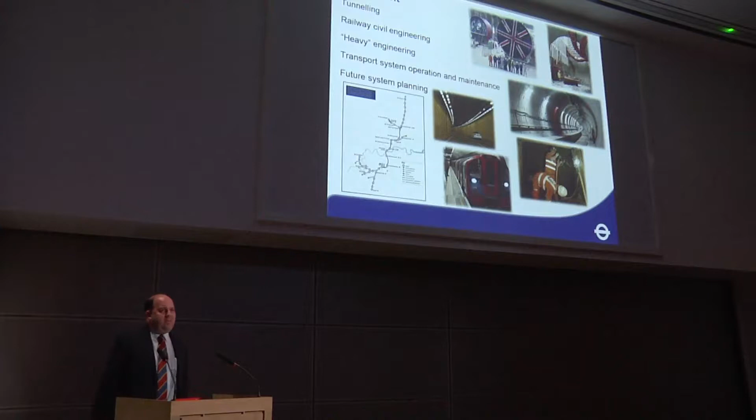So that bit of context and heritage. Well, you've just heard a few kind words about me. My natural habitat is, professionally, it's wet, muddy, there's not much daylight, it's about 30 metres down typically. I've spent my career around holes in the ground. A bit of time on design, quite a lot of time on construction, but also quite a lot of time operating them and maintaining them, which I actually find quite an unusual viewpoint. So that's where I'm coming from.

Just had reference to the Channel Tunnel Rail Link, High Speed One. It's a good example of the sort of thing I've enjoyed doing during my career, and where I think as engineers we've been able to bring quite a lot of innovation into the delivery of a transport system that can make a real difference to areas of the country, and in this case international travel.

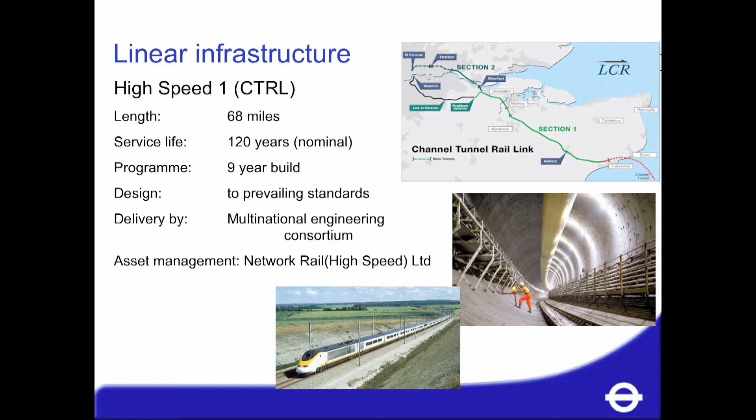So it was a railway nearly 70 miles long. It took us about 9 years in total to build it. Like a lot of big engineering projects, it was a multinational engineering consortium that delivered it. We worked to the standards of the time, developed, tuned to our particular needs. And these days it's managed by a dedicated maintenance organisation.

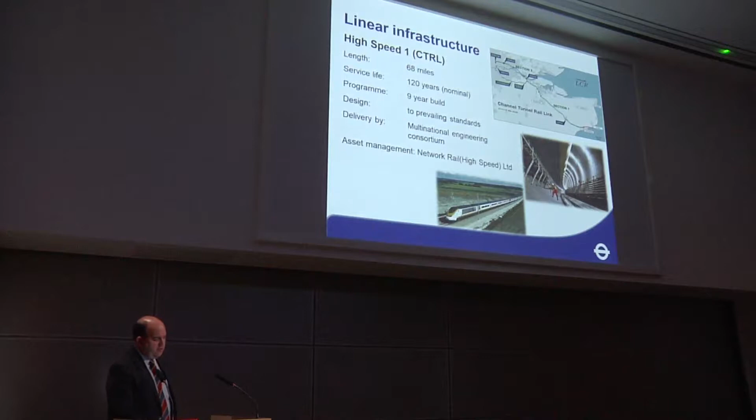So there we are, there's a quick pen picture of a piece of linear infrastructure. Most of what I deal with is linear, it's road and rail, and you find linear systems have some common characteristics. That's a job I certainly feel very proud to have been involved in, and I know a lot of my colleagues do. But I started thinking a bit earlier this year about what I might talk about tonight, and I was actually on another piece of linear infrastructure at the time. I was actually up on Hadrian's Wall with my sons.

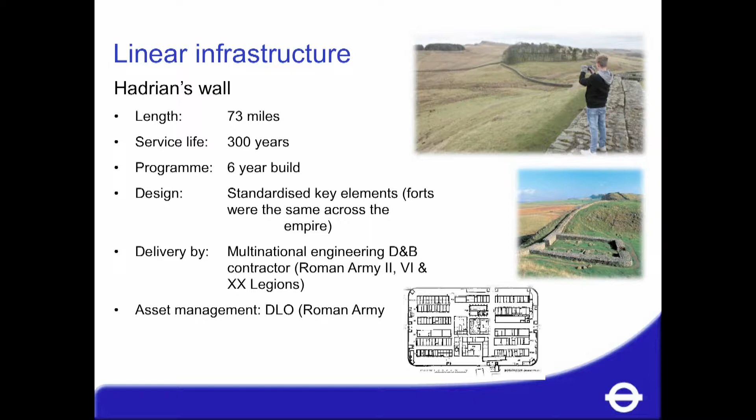Now here's a piece of linear infrastructure. It's about 70 miles long. It took about 6 years to build this one. Interestingly, it was standardised design - the forts are just the same wherever in the Roman Empire you look. It was a multinational engineering contractor - I think that's a fair term for a number of Roman legions. And they didn't dirty their own hands with maintaining it, they got a DLO organisation to do that.

And I stood there on Hadrian's Wall up at Housesteads and thought, actually, this is remarkably familiar, isn't it? I actually thought, well, 2,000 years on, we might manage to build something slightly shorter that took us a bit longer to do. We didn't have quite the same lifetime expectation, and our delivery model was perhaps similar. I found that a fascinating comparison. It really made me think about what changes in our industry.

Because on the face of it, you could look at that and say, well, where's the progress? Why couldn't we do it in 6 months or build twice as much or whatever? And of course, when we drill into it, the engineering is quite different in the detail. But it set my mind going on change, and also reminded me just what impressive engineers the Romans were.

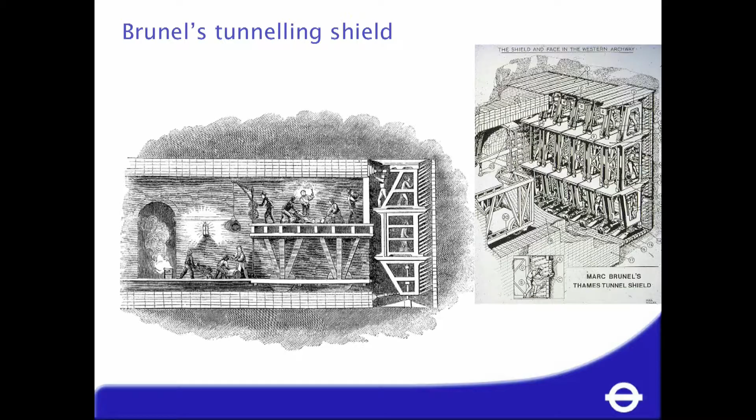So let's have a think about some of the engineering heritage a little bit closer to home for London Underground. We do have a great history, great heritage of innovation within the London Underground system. If we go back to the earliest days, almost 200 years ago, the oldest tunnels that we currently run trains through were, of course, constructed by the Brunels using their newly developed tunnelling shield. It took them a long time, they had some mishaps along the way, but it was undoubtedly innovative work.

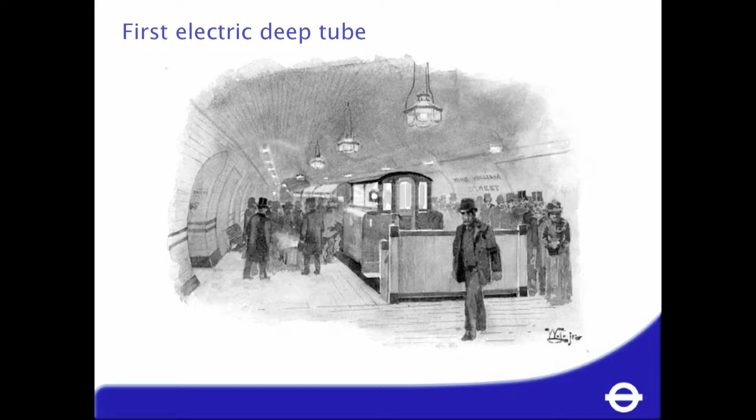We pioneered the deep electric tube. This is the City and South London Railway. We're still only in 1890 here. This is a long time back. We're more than a typical civil engineer's design life ago, but we had electric underground railways opening up in our city.

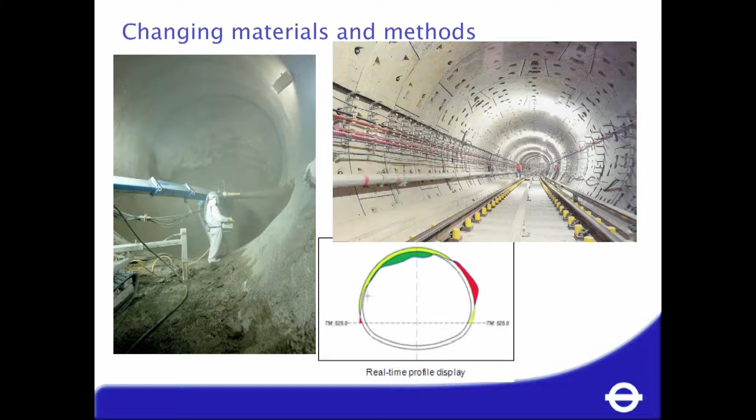Of course, if we dive into the civil engineering, get closer to my home territory in tunnelling, lots has changed there. Materials have changed, methods have changed. In the early days, it was a cast iron structure or a masonry structure. These days, most things are concrete, whether it's high-specified precast concrete like the segmental tunnel there, or increasingly sprayed concrete. And it's delivered with complex computer-controlled systems, whether controlling the erector of the segments or the spraying robot on the left. The little graphic at the bottom is what the nozzle man spraying the concrete can use to guide him where he's sprayed too much or too little.

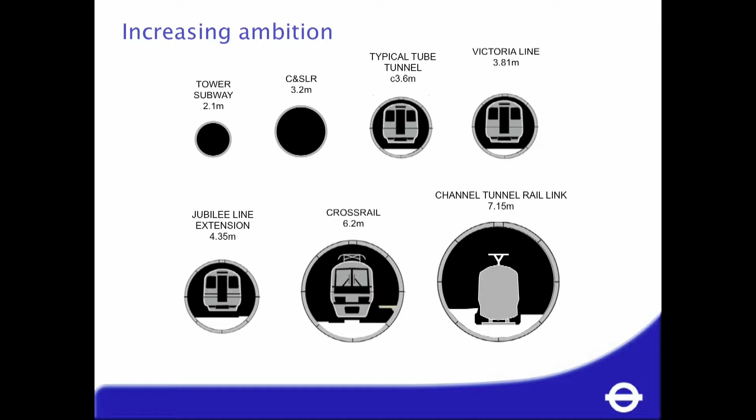And as all these technologies have come along, frankly, we've got greedy. We have asked for more and more out of these systems. This shows you graphically how the sizes of running tunnels have changed in London. The Tower subway, not actually part of the underground system, a slightly earlier railway, down at 2.1 metres, was a triumph at the time it was created. As the tube network was delivered, we successively got larger and larger, greater expectations, coming through to the Victoria line and the Jubilee line extension. We were starting to think about walkways and so forth, getting bigger all the time. Then recently we've delivered the CTRL and Crossrail with much larger tunnels again. So we're ambitious for what we want to achieve.

So there we are. I said my theme was change. Do we need to change? Before we dive into the actual engineering changes in more detail, let's think about why we might want to change in London's transport system.

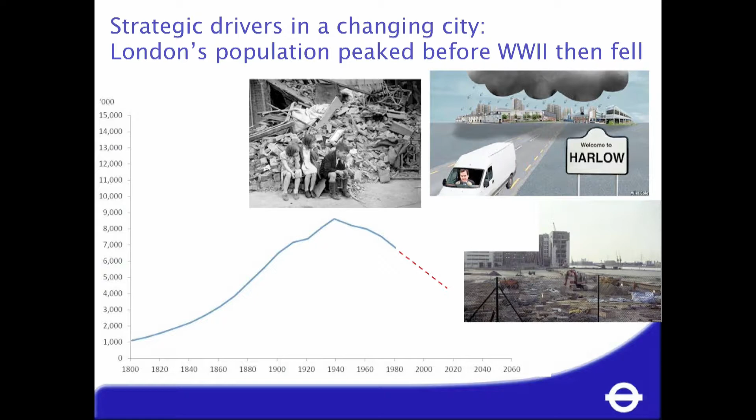This is a population graph for London, the sort of thing you might have seen presented around 1980. You can see that when the Brunels were tunnelling under the river, right at the start of this story, there was a little over 1 million people resident in London. The population grew steadily right up to the time of the Second World War, reaching a peak around the 8 million mark. But then after the war, it changed. There was the disruption of the war itself, social change after the war, development of new towns, and decline in industrial areas in the city. The population dropped away with those things, and it was expected for quite a while that that trend would continue.

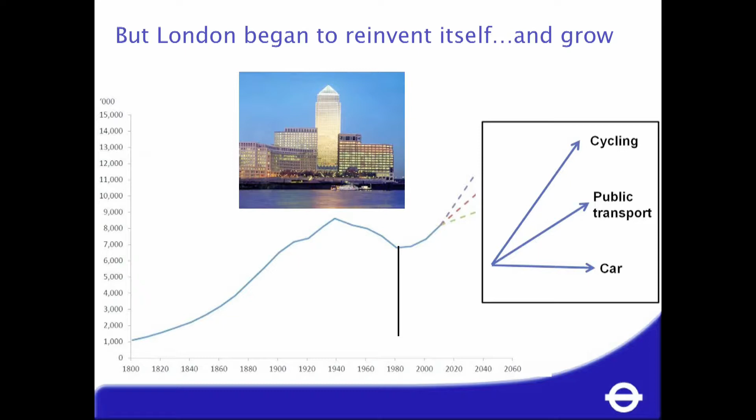But London had a surprise. If we look back now, we see a change in that trend again. Around 1980, 1981, the population decline reversed. Those who were around the city at the time will remember Canary Wharf as a key development of the era and a figurehead for that change. Since then, we've seen steady growth, to the point that earlier this year London's population reached its highest level ever - we're now back up at around 8.5 million, and we're planning actively for a city of 10 million in the fairly near future.

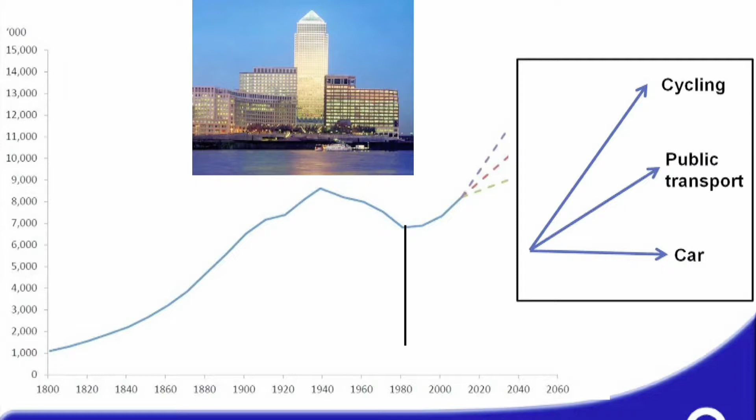And with that, we're seeing change in transport demand. You can see the graphic showing how the transport demand is changing. Cycling's racing away there - of course that's the trend, though the total number of cyclists is still relatively low. Public transport usage is rising greatly, and the car is flatlining. So that tells you something about the demand for infrastructure in the city.

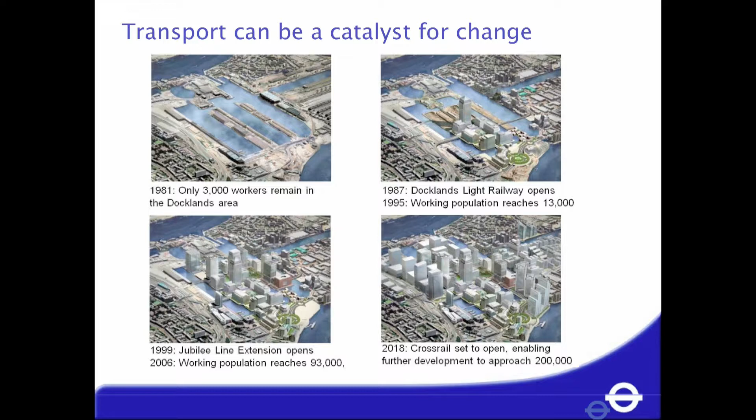If we look forward to 2018 and the opening of Crossrail, we're looking at a further doubling of the working population in that area, back up to around 200,000. So transport and growth and change are intimately linked in this city.

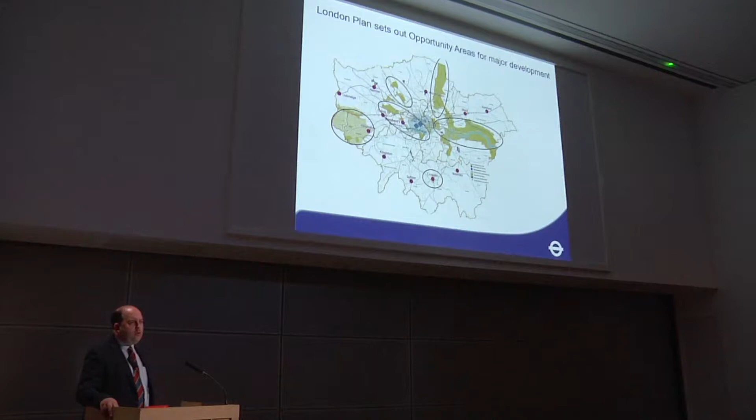The Greater London Authority publishes a London Plan which highlights areas within the city, marked in the rings, where there is a particular expectation of growth—whether in employment or housing, both big drivers. Areas like the Thames Corridor have been identified as potentially growth areas for both. The Lee Valley to the north is seen as a likely dominant growth area for housing. The Greater London Authority would like to see another 200,000 homes in the city in the relatively near future. These are some of the areas where these things will focus, and it tells us about demand.

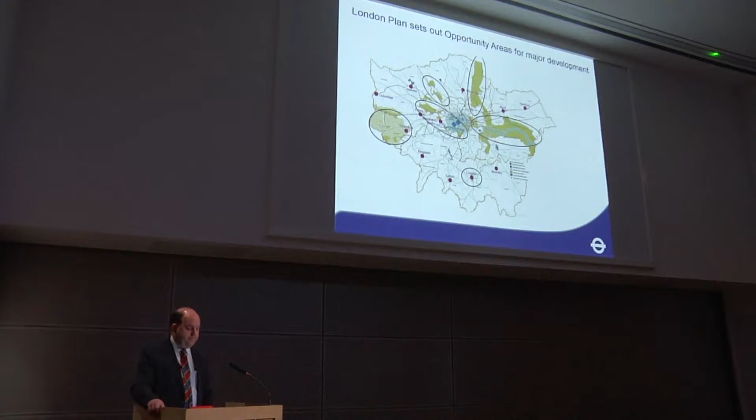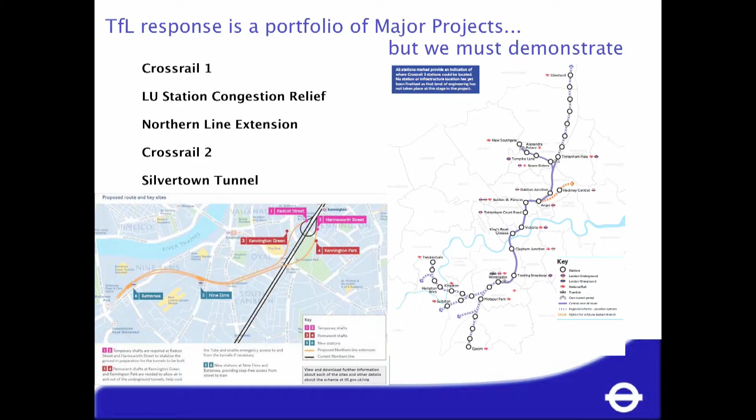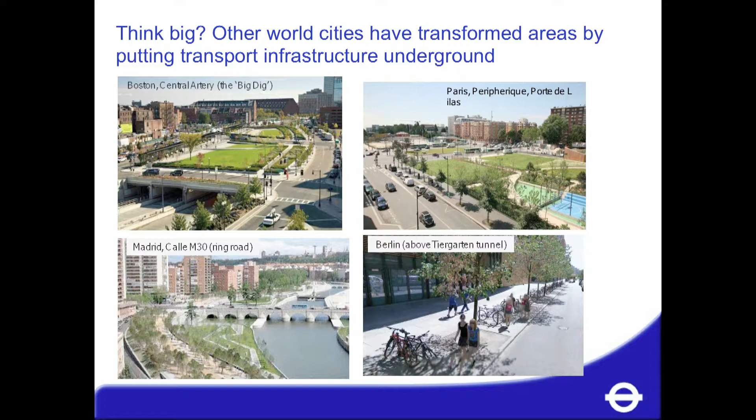So we see those projects driven very much by demand. But I think we should think big, beyond those immediate things. It's quite informative to look at what other cities around the world have done with underground infrastructure. There's a compilation here of cities where transport systems, highways in particular, have been pushed underground to free up space at the surface, often for green space, sometimes for other purposes. These ideas become very important when looking at the magnitude of growth we're facing, and they're a challenge for the people providing the infrastructure.

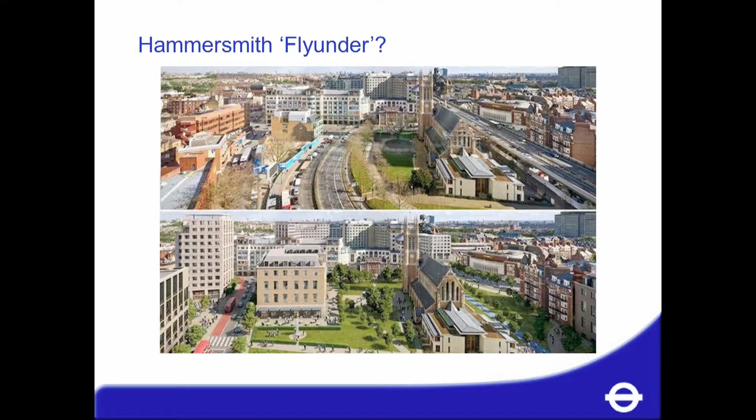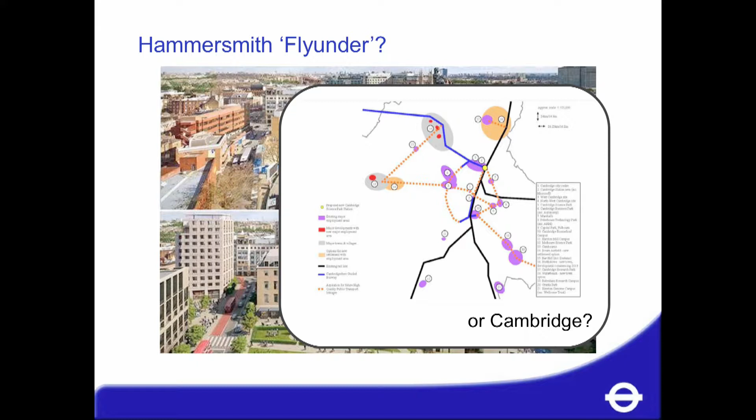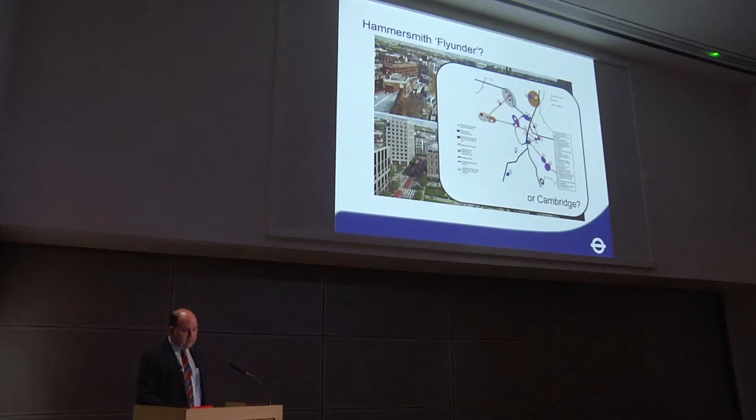And as we were in Cambridge, I thought I'd mention it's not only London that goes through this sort of thought process. There's a lot of communication to do between different cities, both globally and nationally, around how we tackle these questions of demand for more transport and communication in our cities.

So what do we take from all of that? It's quite a simple equation really. Demand is growing—I've just been demonstrating that. Our expectation is it will continue to grow for as far as we have a reasonable ability to project the numbers. And of course our resources are finite, whether that's the national purse or any other measure of resource. We know we have a fundamental issue with needing to conserve resource, so we need to squeeze more performance out of the things we do. And fundamentally, that is why we need to be innovative in this sort of work.

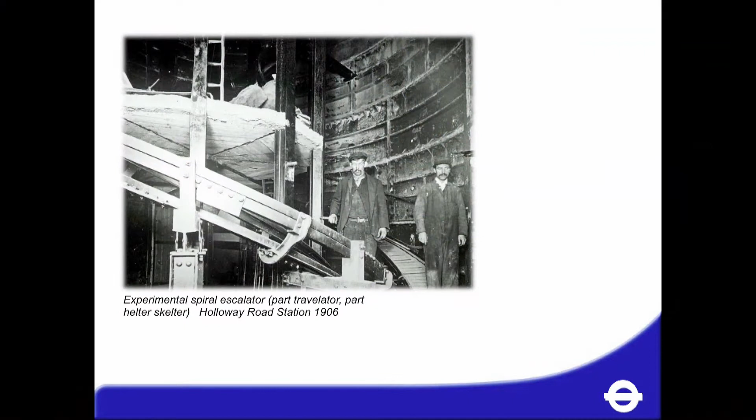Round about the start of the last century, it was becoming apparent that more and more people were using the underground, and we needed the ability to get them in and out of our underground stations quicker. In the early days, that had been done by lifts for the deeper stations. There was a need for a better system, and somebody came up with the idea of the spiral escalator, which clearly could potentially fit in the existing vertical shaft. We have this tantalising picture of these gentlemen trying to put together a spiral escalator. Sadly, most of what we know is that it didn't work and they abandoned it. One can imagine all sorts of mechanical agonies in trying to get that going.

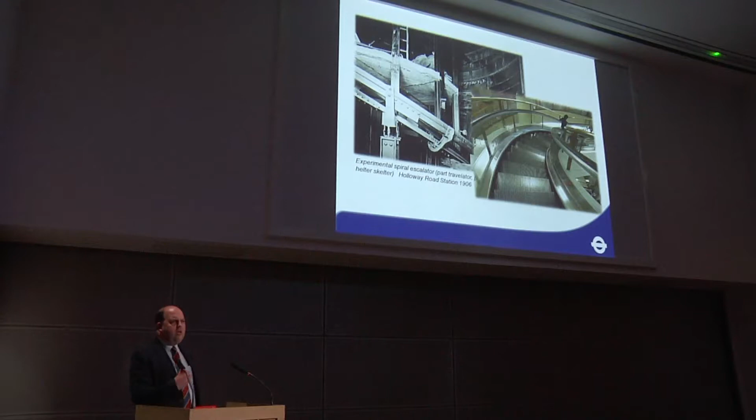Perhaps we just moved our innovation focus somewhere else and learned how to build inclined tunnels, because it was easier to put an inclined tunnel with a straight escalator in it rather than a vertical shaft with a spiral escalator. Maybe we just found the easiest route. But it's interesting to note that 100 years later, you can go to the market and buy a spiral escalator. So the idea wasn't daft, it was just a problem in the execution.

So innovation necessarily involves risk. That might be technical risk, like that escalator—maybe you just can't make the thing work, or more often, you can't make it work reliably. Or it might be a commercial problem—maybe you misjudge the market, or you can't see how to get a financial return on the technology you've developed. But the point is, to be successful we need more than just good ideas or the technologies themselves. We need to think about the actual process of putting innovation into practice, and we need to try and ease that process along, help it.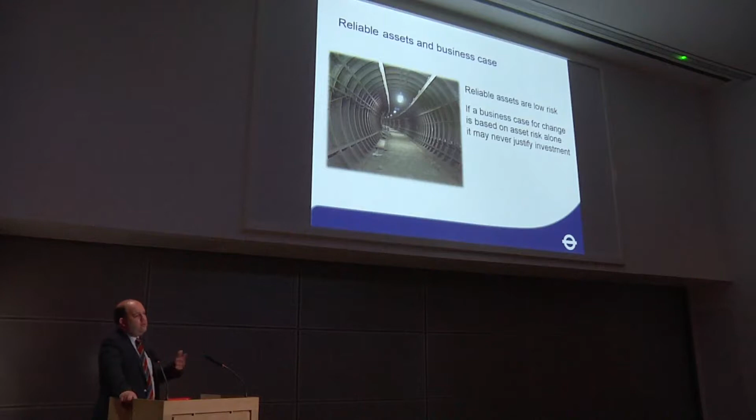Now, if that's the case, it's very hard when you come to make an investment decision to use that risk value to justify your investment, because almost anything you want to try is going to cost you more than the value of the risk. We trip up on that problem repeatedly. Doesn't mean the model's wrong, but it makes you want to ask questions.

Is asset risk the right measure? In many ways, it's probably a very good measure. I don't want to do it down, but it has the effect of perhaps tending to stifle innovation in certain situations. So could we change it?

Could we bring other benefits? For example, if we had a new condition monitoring technology that provided some other information about that tunnel, perhaps who's down there, that might be of interest to us. How often somebody passes through it. Then we might be able to bring other benefits in, and those might give us a win there. So there's a whole area there.

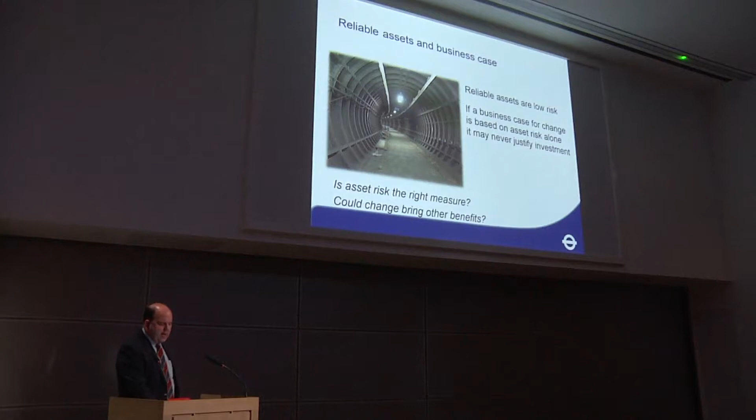We have to think very carefully about how we present the case for this sort of thing. Then there are other issues. Life cycles is a key one again for tunnels. I've illustrated a nominal 120-year design life there.

Hadrian's Wall, that linear asset, they operated for 300 years. We'd like to aspire, we sometimes say, to 400 years life out of our tunnel structures. It's a very long wavelength thing, the life of a tunnel. And it's long compared with other things we deal with, like buildings and trains and so on.

And significantly, it's long compared with an engineer's career. So if you think about an engineer who spends his life maintaining that tunnel, he's not really expecting to see any change in there. Now, if you think about some of the other things that influence us, for example, IT, that we embed in a lot of what we do...

Our parliaments, our government cycles, our typical research projects, they're much shorter wavelength things. And people expect to see many changes in a career if they're dealing in those sort of things. That mismatch is quite important culturally. That's partly why the asset manager who lives in the long wavelength thing can find it difficult sometimes to appreciate the high frequency events in perhaps the research community.

It's also significant to note that our asset management strategies are only typically good for a very small proportion of the life cycle of the asset. And that's to do with how we discount money in our economic systems. So there's an issue we wrestle with.

So let's look at some things that have worked well in recent years around our system. Here we are - this isn't actually recent work, this is 100 years ago, one of those escalator shafts going down. If you look closely, there are 4 men working in that face, lots of timber, some fairly hefty sized props in there. The thing I particularly like in this photo is this ladder - if you look closely, that ladder wasn't quite long enough, but happily they had a couple of pieces of wood and some nails. An innovative solution. That's how we used to do it.

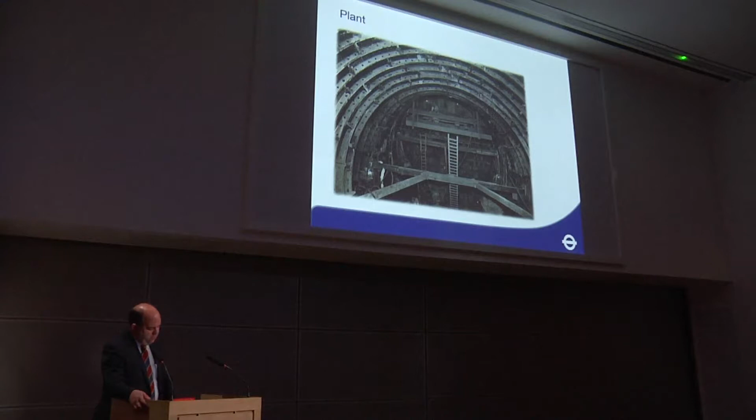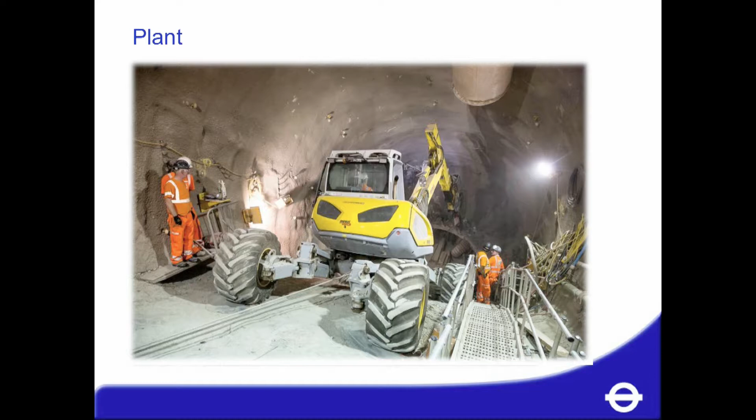You look at what we're doing today with a vast range of modern plant. I don't think it's necessarily the last word in doing this sort of thing, but we've come on enormously. We now have sprayed concrete, so we didn't have to put people up to put timbers up everywhere. We have sophisticated machines capable of walking on all kinds of uneven surfaces, although you'll note we still like to tether it with a rope as well, just to be sure. These open up possibilities for doing the works in much safer and probably more efficient ways. And of course, if you look at projects like Crossrail, we have sophistication and high-speed production from some very clever tunnel boring machines. So there's lots of stuff going on in the plant world that's helping take us forward.

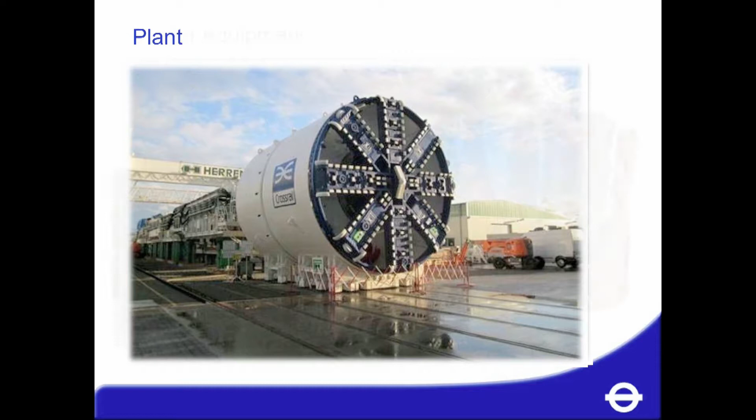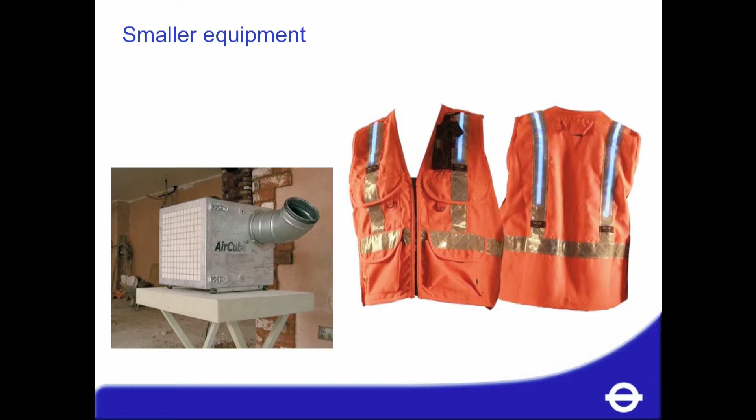We've also got better at mining into different areas. Victoria's always been a challenging site for London Underground. It's shallow, an area that was basically marsh and now has a lot of made ground, difficult material to work in, lots of groundwater, and a fairly unhappy series of misadventures have happened on various generations of tunnelling there.

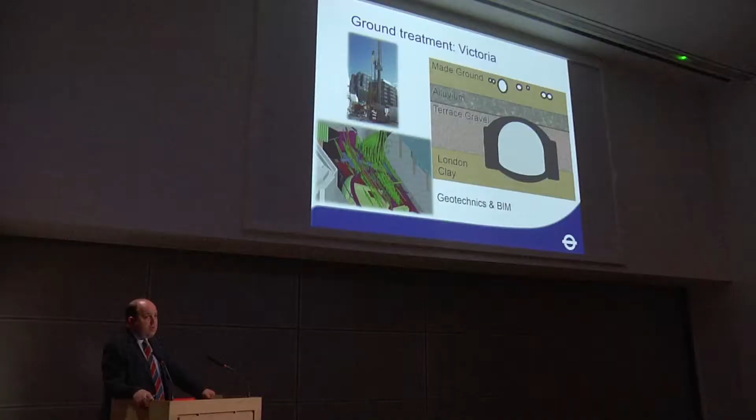We're tunnelling again now at Victoria, and we've gone down the route of ground treatment. We've used a jet grouting process, you can see the rig there, to inject and effectively mix cement into the soils present to form a solid block through which we've then driven our tunnels. And it's worked very successfully here. This has been a great project for innovation because the application of jet grouting itself, the geotechnics, is bringing new practices and developing skills in a difficult environment.

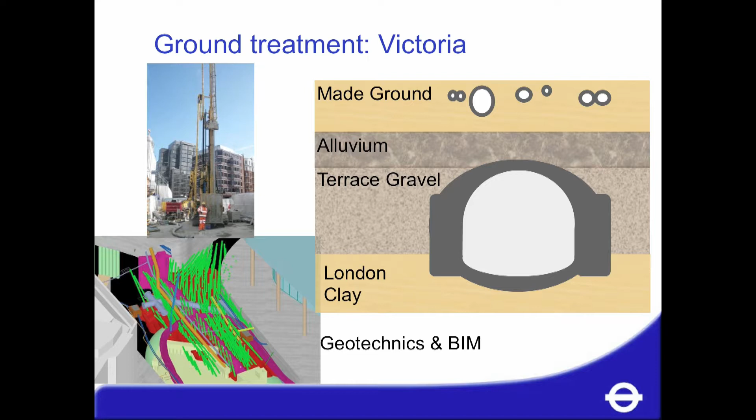But we're also doing it in conjunction with the BIM modelling. Down on the bottom left there, the forest of green spikes is the computer model demonstrating where all the grout holes have been put, where all the treatment holes have gone in. And that model has been an integral part of the process. We've used the model to assure ourselves that we've treated everywhere, and we've also been able to spot gaps with it as we've gone. So the two technologies have come together and given us a very robust solution.

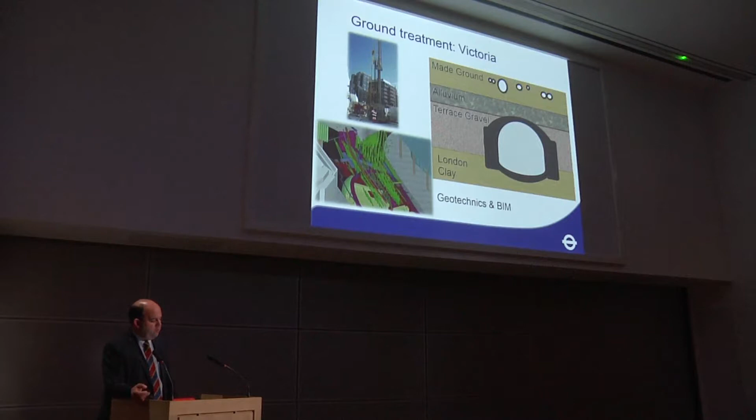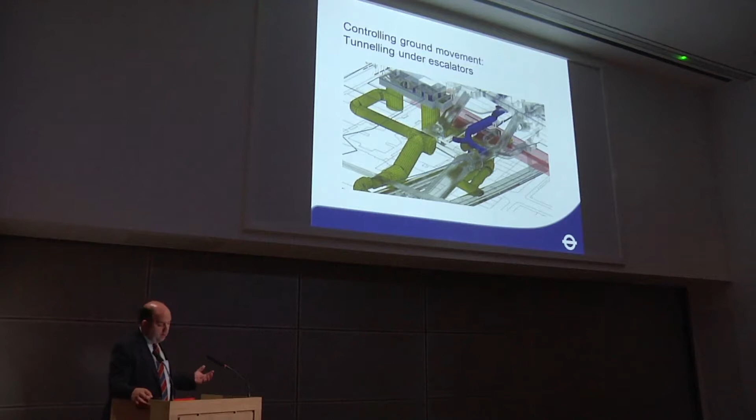In the course of that, we've had to control the effects on our own assets, and particularly the escalators, which are very sensitive to movements. We've been able now to repeatedly drive tunnels through this sort of system without causing serious disruption to many of the assets we've gone under, or in some places we've had a degree of controlled closure locally, but we've been able to manage the consequences. This is the sort of stuff we wouldn't have known how to do going back a number of years, and this is huge progress because it makes further works possible.

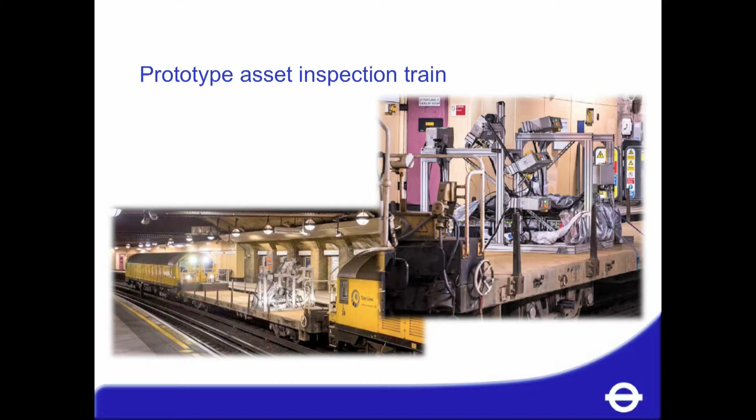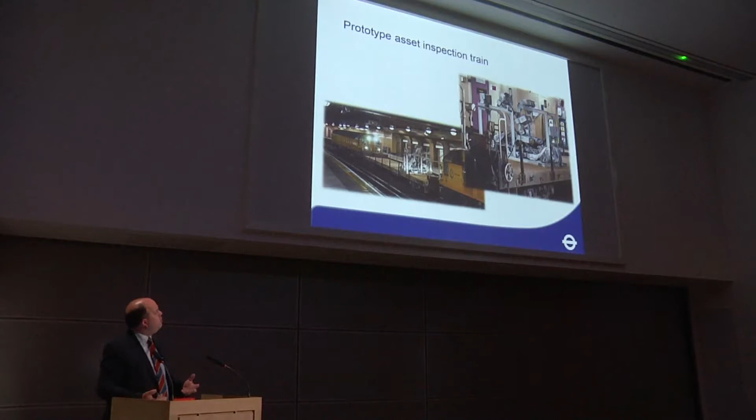Quite a lot of the challenges are not so much in the hardware, actually, that's on the train there. They're actually in the manipulation of the data. It's the vast point cloud models that one might extract from this sort of thing. How does the asset manager, who used to get a nice little handwritten report from his inspector, assimilate gigabytes of data and turn it into something useful? That can be the challenge there.

And wireless remote condition monitoring - I know there are people here with a particular interest in this tonight. This is, of all of the new technologies I've seen around the underground over the last decade, the one that is most clearly now found its time, it's become mature. And we're seeing deployments on a very significant scale.

The middle image is a tunnel we've just finished reconstructing, where we've been building cast iron segments, and the temporary works engineers on it are using wireless Senceive units here, on magnets, which they can just plonk on the segment and have operating immediately. That's been great for working under time pressure and getting reliable data back.

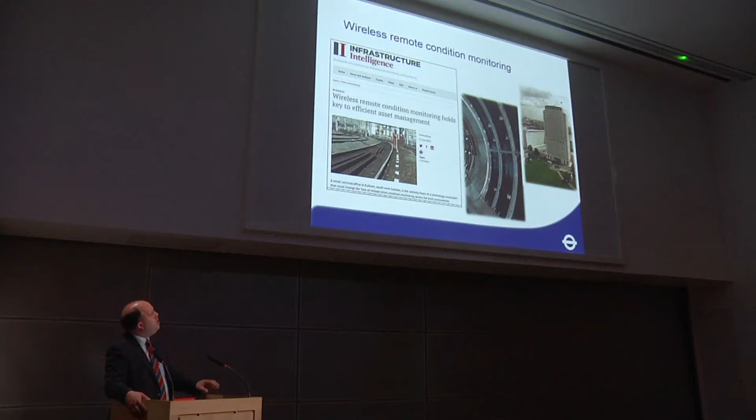And we're now seeing developments like the Shell Centre reconstruction over there on the far side, going ahead with our complex assets underneath, having extensive wireless monitoring systems in there. We've now got to the tipping point where really the expectation is that a monitoring system in that sort of environment probably will be delivered wirelessly. Not long ago, in fact very recently, we would have assumed kilometres of cabling to make that happen. So this is a technology that, as I say, is finding its day.

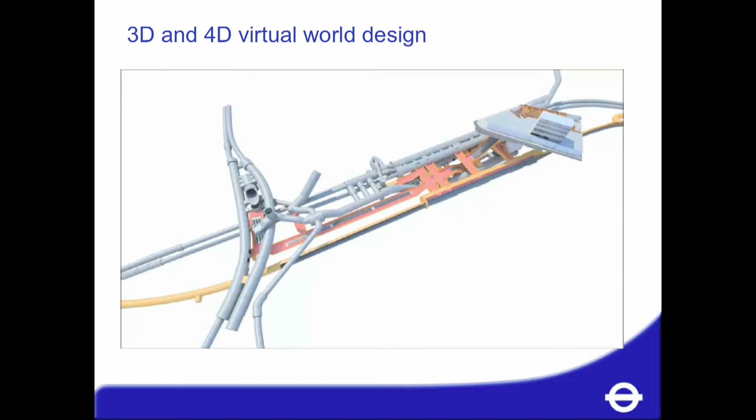We move across into the design world. This is Bank Station, another project I've had the privilege of working on the last few years.

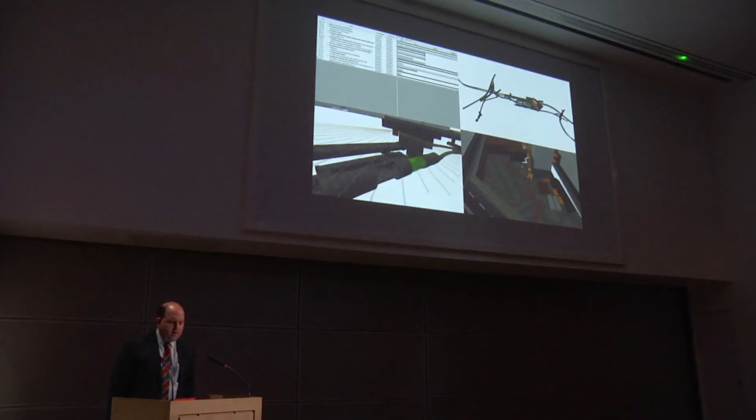This takes us back to BIM and 4D modelling. The video running in the top left is just scrolling through the program, a job that's in the design phase at the moment. The top right is an overview of the whole 3D model of the station, and you can see areas of activity in green and orange.

Essentially green is underground and orange is surface work. The two images at the bottom are zooming in, and you can see there's complex geometry there, with lots of scope for things not to connect. Fundamentally, doing this in a 3D virtual world is great for understanding the connections, and adding in the time dimension is great for planning how you're going to deliver it.

What I'd say is this is very old hat, what's running here now, because the designers are not necessarily using that on a 2D screen like we have here. They're actually now into virtual reality headsets to allow them to explore that environment they're creating. It's a piece of innovation which maybe our kids might be familiar with, certainly those of us who have teenagers, but it shows how design practice is changing and adopting new tools.

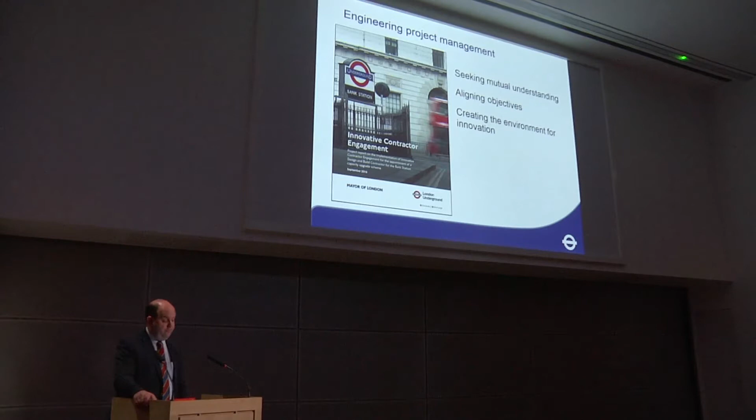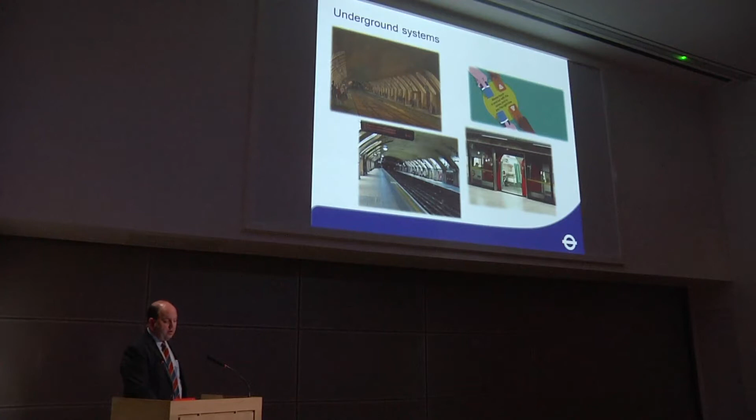And of course there are other things going on around the railway. We have things like platform screen doors now coming in, changing expectations of what stations should look like. We have other technologies, like contactless payment, one of the big changes we've had in London, facilitating different behaviours, making it easier for people to access systems and also easier to manage for the operator. So there are lots of different areas of innovation going on within our system.

So what about the future? We're doing quite a bit of change, and we've got some positive results out of what we're doing. Where are we going? Well, what's going to happen to London? That's a huge question.

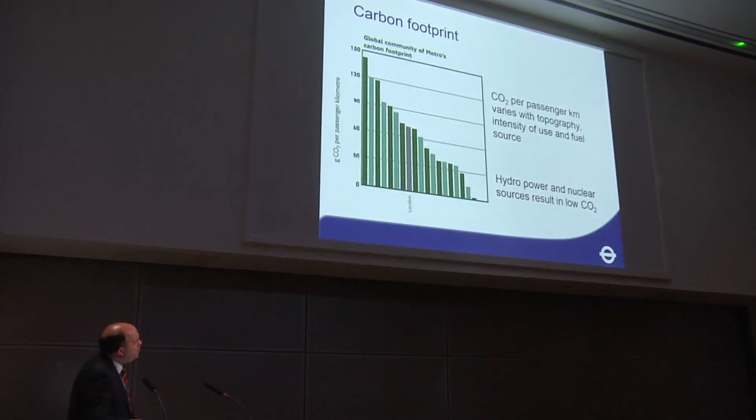What we can perhaps anticipate, rather than trying to imagine exactly what the city landscape will look like, is a bit more ability to spot what some of the issues are. Particularly with sustainability and such like, we can start to anticipate where the pressures are going to be. This is a ranking of carbon footprint of a number of the world's largest metros, and we can see London is distinctly middle of the road in this particular community.

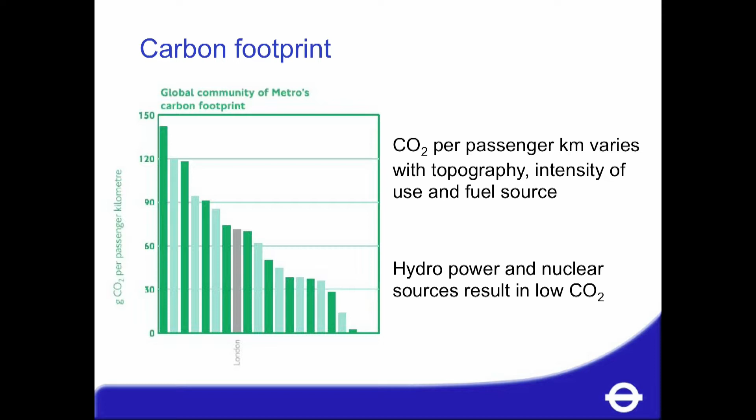Question that intrigued me when I first saw this was how did the ones at the low end of the scale get to achieve their low results? Well, the answer is either they run on nuclear power, form your own views, or in one case in South America, effectively they run on hydropower, which is a pretty elegant solution if they can reduce the carbon footprint to that level compared with anyone else.

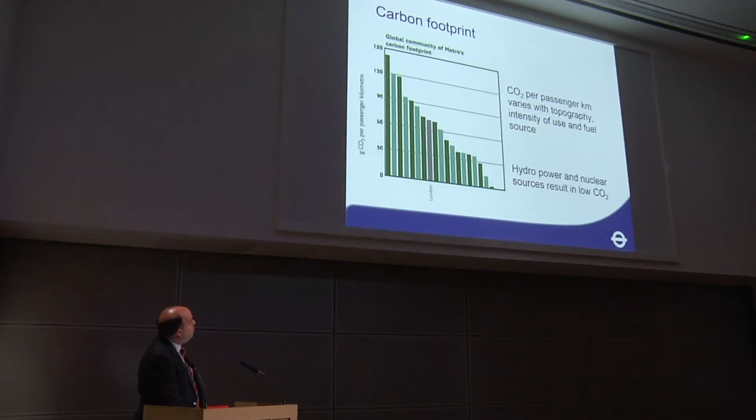I just offer this graph as an observation of the sort of issues we have to face. I don't think I have a clear understanding of exactly where we'll be going with this. But some of the other effects of climate change and so on, one can start to anticipate.

Well, these days, of course, we understand that we've actually heated up the ground quite a lot by operating the railway. We have some wider concerns as well about whether it's getting warmer anyway. And we've done a lot of work to try and develop a bit the infrastructure we have with things like better ventilation and borehole cooling and various other ideas.

This is an issue which I think still has quite a way to run, and perhaps there are more technologies out there, more innovations that we're waiting for.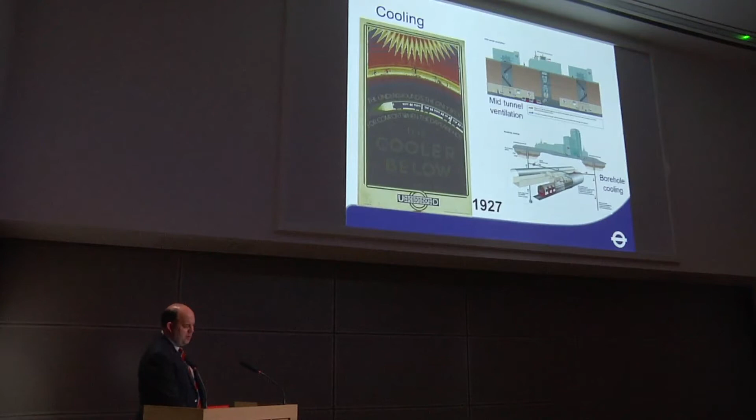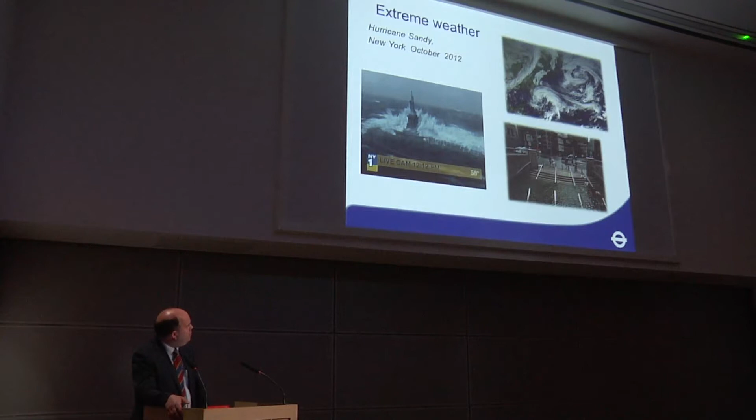Some real challenges here, but again, scope for innovation. We look at this and we think London, Thames Barrier, keeps going for a bit. New York don't have that.

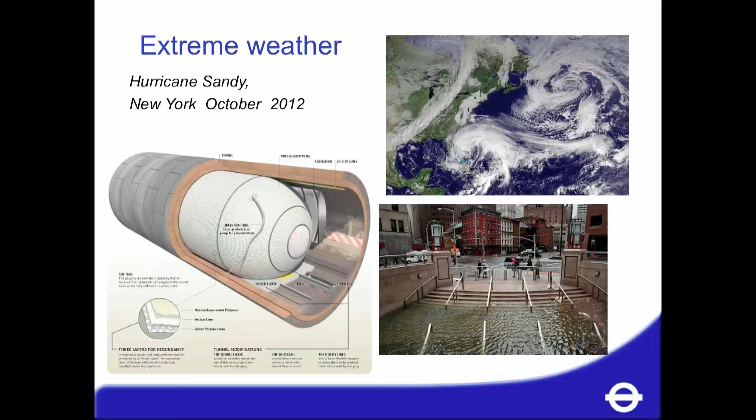They've just decided to invest in this technology, which has been around for a little while. Effectively, it's an airbag, an inflatable plug to quickly seal off the entrances to tunnels. Quite a neat idea. I'd be fascinated to see one actually in operation.

So the big picture, where are we trying to get to overall? At the end of the day, what we've really created at the moment in London with all the technologies we use, including the few I've illustrated there, is actually a pretty reliable railway.

We're a great deal more reliable than we used to be. We still have targets to become much more reliable than we are now, but we're moving in the right direction. So our reliability is getting quite well up there.

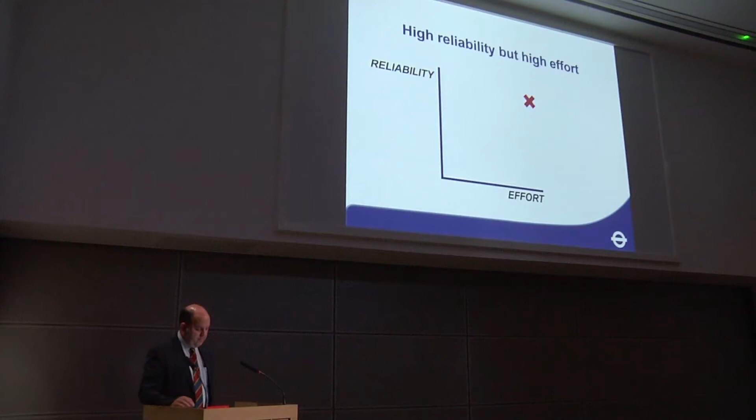But it comes at a price. It comes at a price of effort. By that, a lot of that's related to our infrastructure. We actually have here in a typical tube tunnel a very complex set of quite ageing infrastructure. Lots of different systems in there.

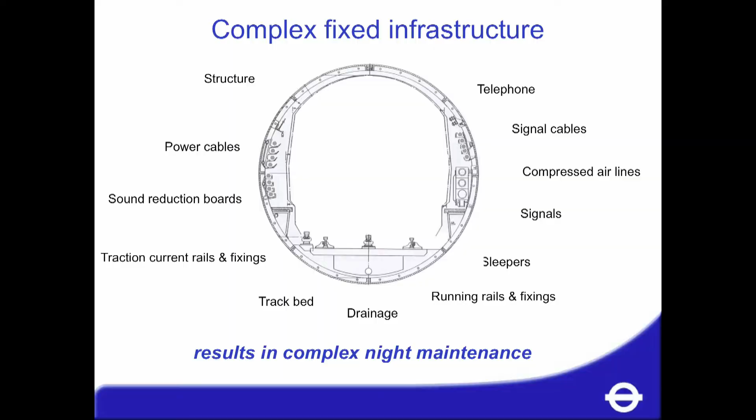And therefore, to keep it all working, we always end up with lots of people in orange in the middle of the night, just for an hour or two, not the most efficient way of working, doing lots of stuff to make sure that we keep that reliability up.

So that's achieving what we want now, but surely it's not what we should be aspiring to. What we should be aspiring to is finding ways of moving ourselves across the graph like that. We want to keep the reliability up, but we want to reduce the effort. We want to reduce the interventions that are needed.

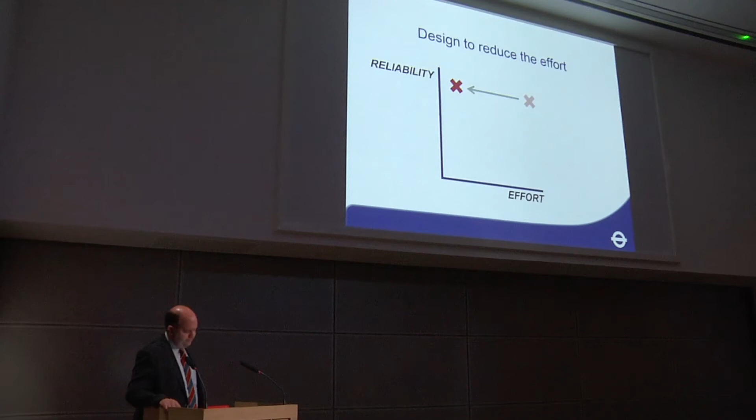So maybe what we need to do is go to some very simple fixed infrastructure. Perhaps we could reduce an underground tunnel to this, just the structure itself to stop the ground coming in, and some sort of guideway perhaps, just to point the vehicle in the right direction.

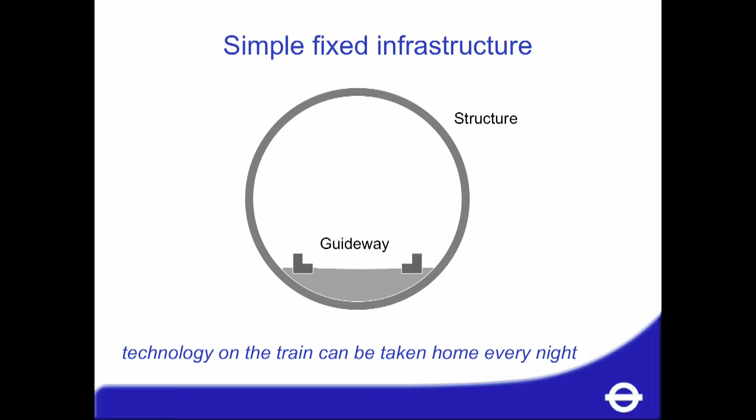We could put all the rest of the technology on the train, and then it gets taken home to bed in the depot every night, and it's much easier to work on. It's kind of an aeroplanes-without-wings vision of a train, and a lot of our trains are not far off the sophistication of aeroplanes.

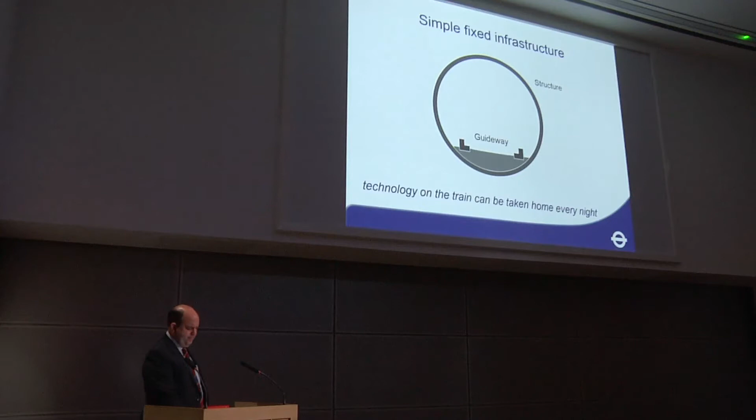You start thinking about guideways and so on, you start thinking about metallic wheels and rails. I started off with the Romans and started wondering what had changed in 2,000 years. Well, for the last 200 years, basically, we've been using metal wheels on metal rails. And if you look at the maintenance that's happening down those tunnels or on most railways, an awful lot of it is to do with wear on metal wheels and metal rails.

Maybe we should be looking at some of these other systems. We've got to challenge what's accepted as the norm if we're really going to make step changes in what we do with our infrastructure.

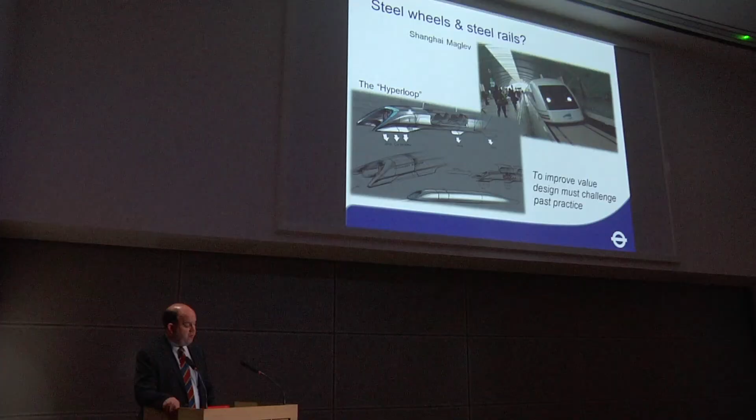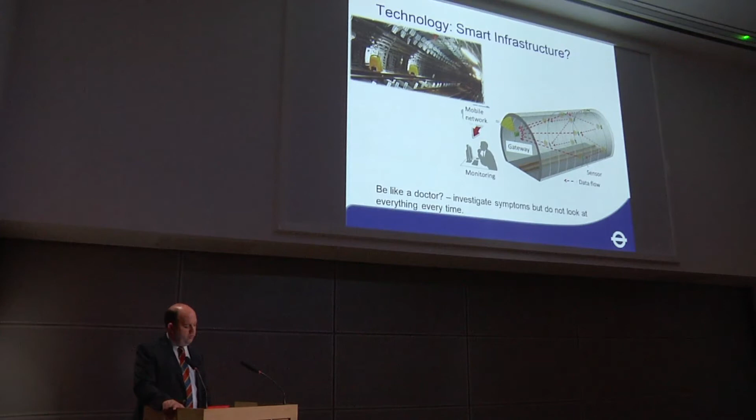So to finish, here's an invitation, and this is genuinely an invitation to all of you. Transport for London has a task. This is one of the formal sets of wording we use: our role is to keep London working and growing. It's not just about now, it's not just about the status quo. It's about serving the future when it's 10 million people in the city, or whatever. And we're about making life in the capital better. We're about facilitating that change.

But we know that the rapidly growing population is making this a hard challenge. What we've done as an organisation is look at a whole series of areas where we believe there is a particular need for development and improvement. And this is where the invitation is there for anyone to suggest better ways for us to do things.

We're also a people business, not just our passengers but also a large staff who make this system operate. We need to make sure that we give them the best tools, that we create the right environment for them to work in, and that will be changing as well, as the demands on our organisation and our transport system change.

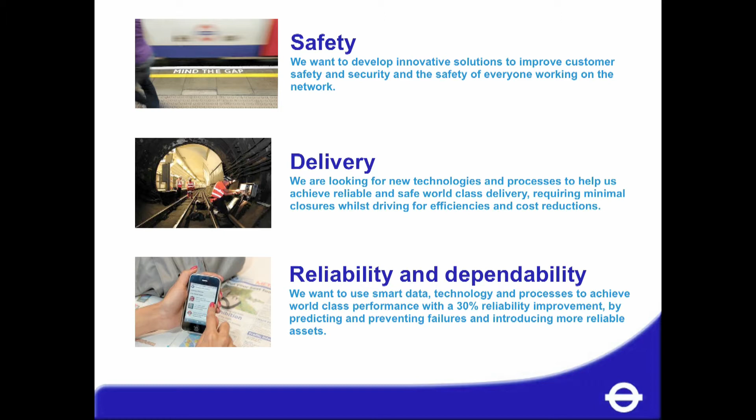Delivery is a challenge to us. We're doing huge amounts of capital work around the system, huge amounts of renewal, while at the same time trying to operate more and more services. We're running more trains, we're running more through the night, we're running them closer together. Delivery in that environment remains a real challenge, and small increments in technology that might take the pressure off that could be a huge win for the organisation.

And lastly, reliability — I've talked about that as well. We know there are lots of ways we can capture information about our assets, the performance of our assets. We know that our reliability is getting a lot better. We know that it's not perfect. To achieve the sort of performance we aspire to, we need to get better, and we need to recognise that technology and technical innovation must play a part in that.

So TfL has developed what's been called the Technology Innovation Portal. If you go to the TfL website, you can find this portal, and it invites you to make suggestions, essentially. If you put suggestions in here, they will be considered by people with appropriate skills across the business. Quite a number of us contribute to this as and when suggestions come in. But also in there, something I'd encourage anyone in an organisation like CSIC to look at.